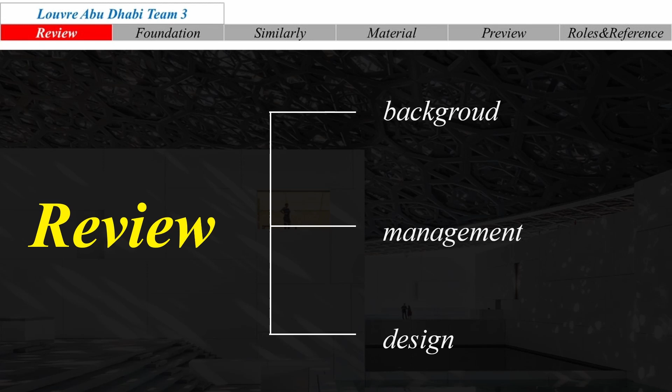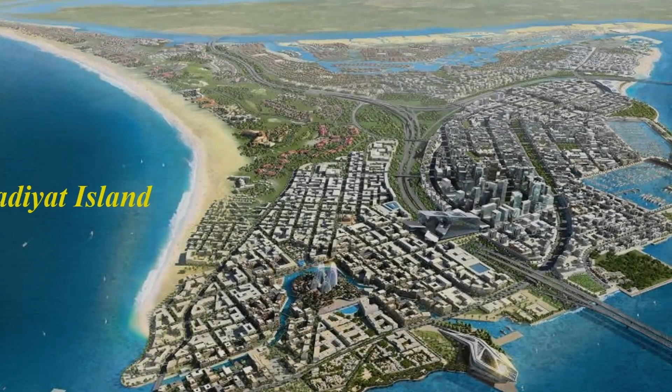Last time, we talked about the background of the construction of the Louvre Abu Dhabi, the process of the construction and design. Abu Dhabi wanted practical and eco-friendly development measures through various economic industries away from the oil-oriented economy. They built a culture and tourism industry on the island of Saadiyat, the first of which was the Louvre Abu Dhabi. However, the construction process was not smooth.

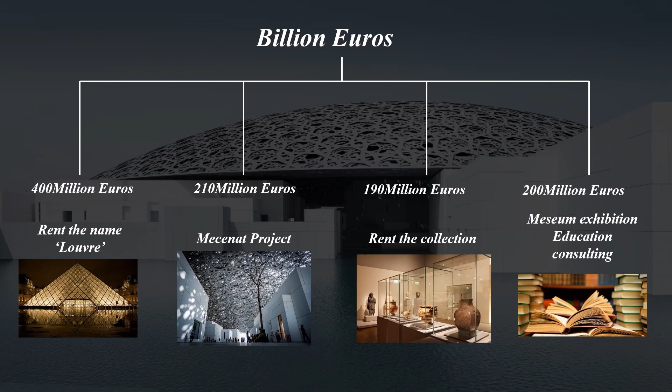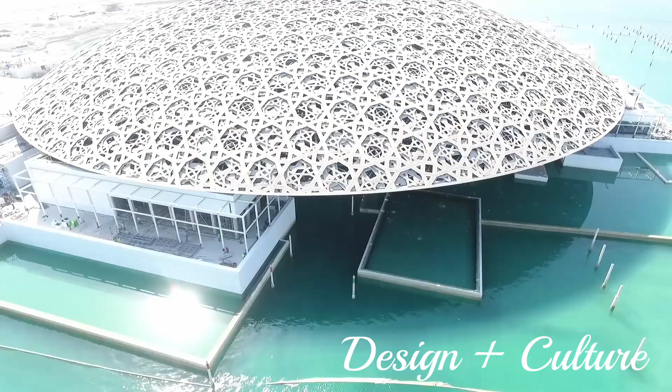In the design process, Abu Dhabi also wanted to show its culture through its architecture. As a result, the current site where concrete, water, and light can be harmonized was selected. Arabs had to control light when they built buildings because of the hot sunlight. Therefore, we created an oasis by adjusting the light so that only 1.8% of sunlight can be transmitted by applying the style of Mashrabiya to the attractive dome shape.

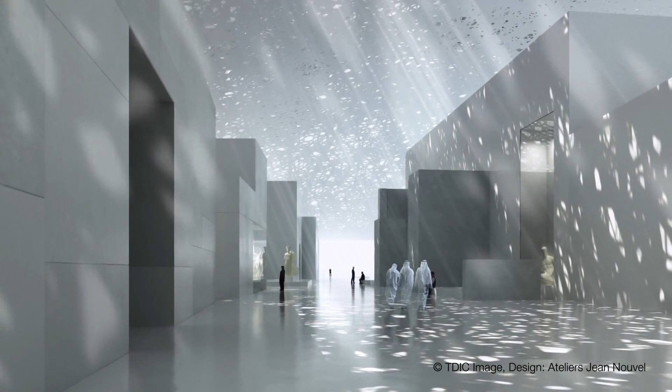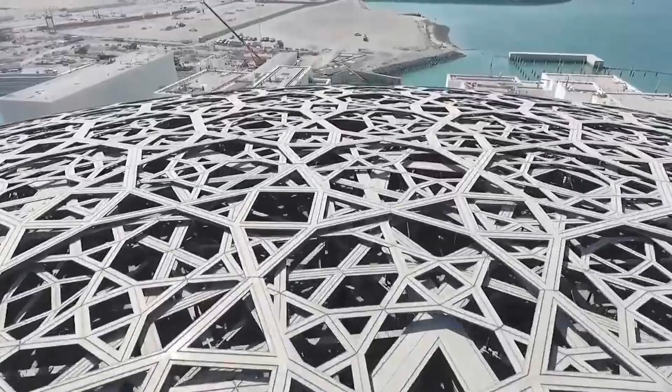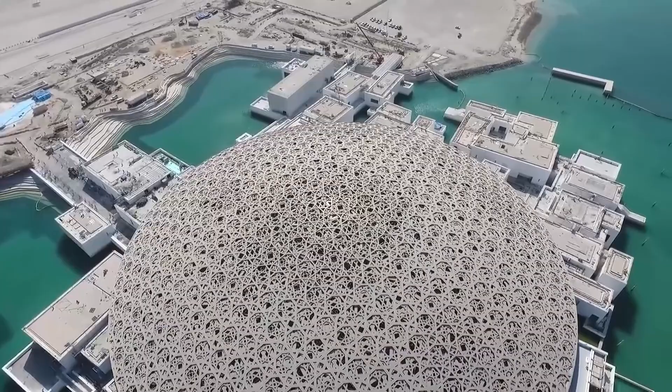These beautiful dome designs have created 7,850 different beautiful rains of light by overlapping 8 layers of arabesque patterns. The shapes below the dome contain the Arab culture that flourished in the past. To create an island on the sea, such as Archipelago, a sand island near Abu Dhabi beach, we connected the sea with the motif of Falaj, an ancient irrigation system in the United Arab Emirates. Finally, concrete. Let's start with the foundation.

I will explain the basic construction of the Louvre Abu Dhabi in chronological order. First, I will explain the process of building a building. In February 2006, a delegation, including the French Minister of Culture and related persons, arrived in the United Arab Emirates. They wanted to build a world-class museum in Abu Dhabi. The proposed site was a sand island called Saadiyat, which means an island of happiness, located only a few hundred meters away from Abu Dhabi's port.

There were once many people living on Saadiyat Island, but at the time it was home to seabirds and nesting turtles. Also, in the 1970s, there were greenhouse-like factories to supply tomatoes and cucumbers to cities. Even the most notable visitor of this period was heavyweight boxer Muhammad Ali. Abu Dhabi wanted to transform the island to help its economic power, and in March 2007, negotiations and plans were announced.

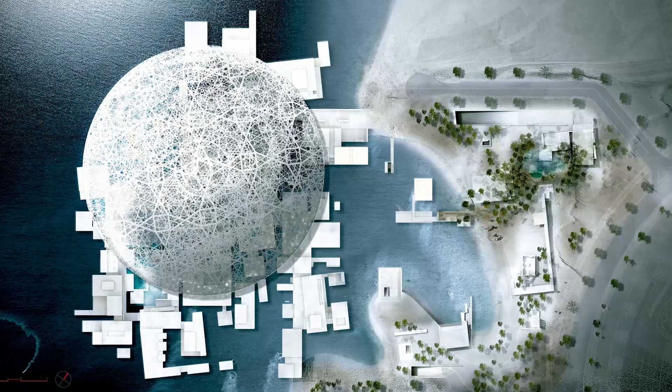The plan is to connect new bridges and highways to the island and build a culture and arts center. As a result, the Louvre Abu Dhabi Museum is at the center of the communication between local culture and world civilization. The previous plan was to open the museum in 2012, so a huge shoreline and sand barricade was built in the sea. Millions of tons of sand were also pumped into enclosed spaces to build the foundation of the museum with concrete pillars and steel rods.

However, construction stopped as the global financial downturn that began in 2008 and the Arab Spring in 2010 postponed its opening until 2014. Subsequently, construction of the Louvre Abu Dhabi resumed in January 2013. Louvre Abu Dhabi pursued a design direction that connects sand and the sea. Later, they were going to refill the water and make it look like it was floating in the water from a distance. We sought a well-balanced design of water and high dome roof in the lowest area of the building. At the time, the project manager said such a design was like taking an empty bottle and putting it in the water.

During the suspension of construction, the Louvre Abu Dhabi construction site returned to its original state. A huge pump runs 24 hours a day, all year, draining water up to 7 meters below sea level through the dam wall. Even if the water was draining, the salt water that continued to permeate it was not suitable for preserving the museum. So, when the construction resumed in the spring of 2013, the first task was to install the waterproof membrane around the entire building.

The waterproof film is made of double-layered green waterproof sheet. The layer was divided into heat-sealed compartments and then vacuum tested to ensure there were no leaks. To prevent further water intrusion, 4,500 columns were wired with a system to prevent concrete corrosion. And the next section is an example of buildings similar to the Louvre Abu Dhabi. There are many landmarks in the hot weather of the United Arab Emirates. In addition to the Louvre Abu Dhabi, there are Burj Al Arab, Masdar City, Cayan Tower, and Burj Khalifa.

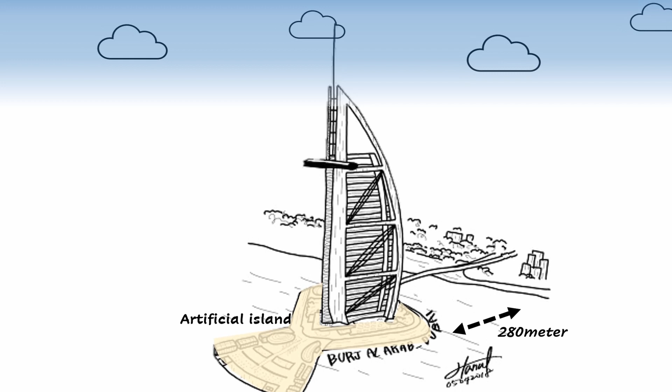Among them, there is a building built on an island similar to the Louvre Abu Dhabi. It is Burj Al Arab in Dubai. Let's compare this building with the Louvre Abu Dhabi. Burj Al Arab is based on an artificial island 280 meters from the beach. The artificial island is located 7.5 meters above the surface of the water.

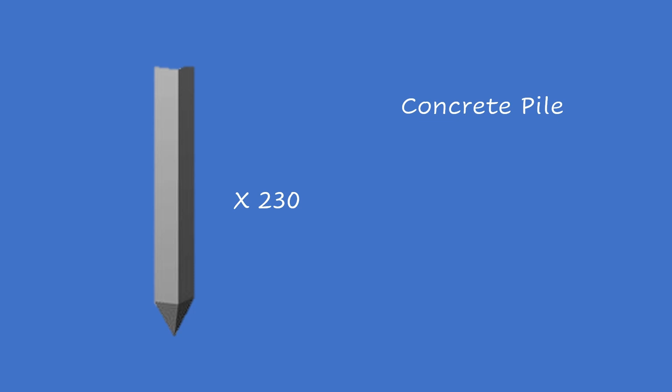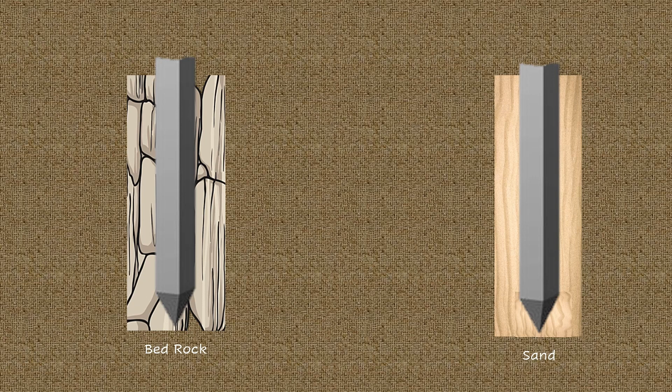The main concern in building Burj Al Arab is to protect the island. It was necessary to prevent the waves from breaking and affecting the structure over the island. To strengthen the foundation, 230 concrete piles with a diameter of 1.5 meters are embedded 40 meters below the sea floor. The foundation of the building is not supported by bedrock, but by friction between concrete piles and sand.

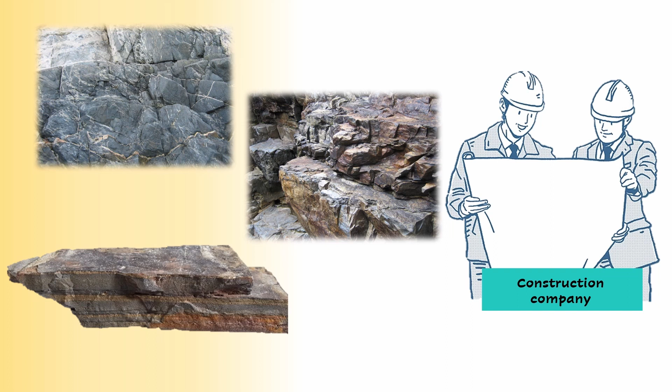After the foundation of the building was built, the ground floor was built. At the time, architects and construction companies had conflicting opinions. The construction company's opinion was to use rocks that could easily use existing technologies. However, architect Tom Wright rejected the proposal. His concept is a ship floating in the sea that allows people to get closer to the sea, because using this technology makes buildings go up too high. Therefore, concrete blocks of unusual shape that can reduce the impact of waves were used.

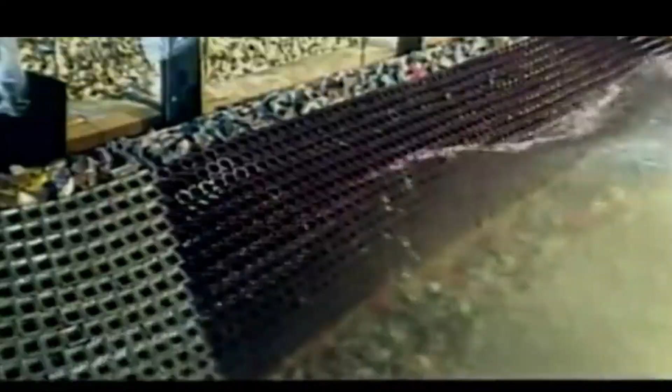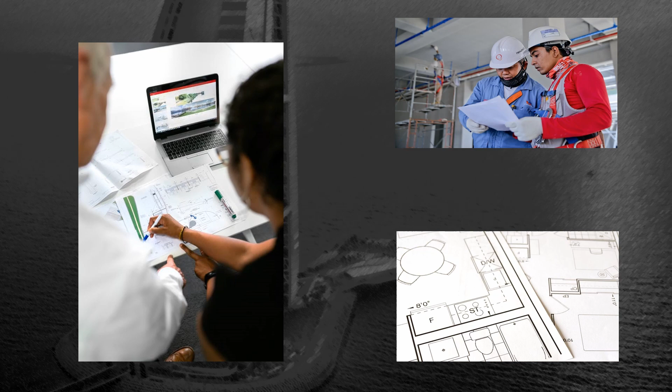Experiments were conducted for stability. The experiment reproduced the waves in the Arabian Gulf over the past 100 years and allowed them to collide with blocks under various conditions. The concrete blocks, which were recognized for their stability after 3 weeks of experimentation, were used technically and aesthetically to complete the Burj Al Arab. This Burj Al Arab example shows the flexible construction techniques when it is an artificial island with strong waves.

In contrast to the Louvre Abu Dhabi, concrete blocks are used to fix the foundation with friction between concrete piles and sand and block waves. Since the waves are weak at the Louvre Abu Dhabi, no separate method of blocking the waves was used. However, strong waves can come from earthquakes and tsunamis. Therefore, it would be much safer to use concrete blocks such as those used in Burj Al Arab.

Now, we could elaborate more details of the materials of the foundation and waterproofing solution of the Louvre Abu Dhabi. Brian Cole, who is a director with Buro Happold Engineering, said, "This project combines one of the most aggressive external environments, seawater, and one of the most stringent requirements for dryness. Especially salt water is the enemy of museums and the precious objects they conserve."

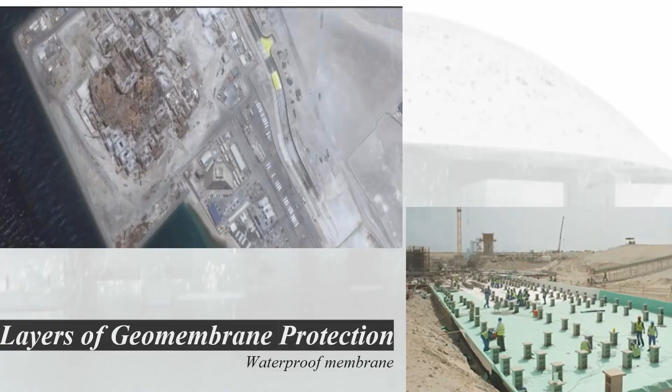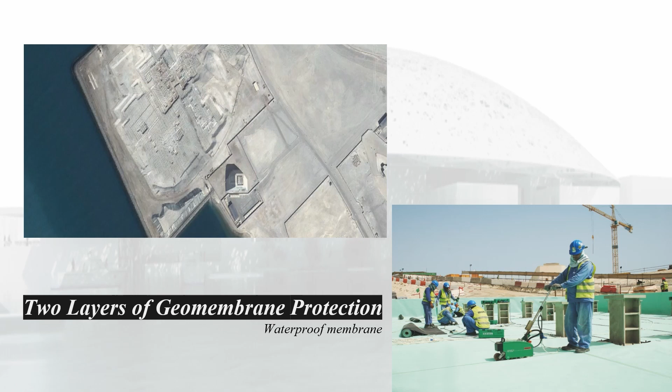So, as construction resumed in the spring of 2013, one of the first tasks was the installation of a waterproof membrane to enclose and protect the entire building. To ensure watertightness, a two-layer system was selected. A 1.6mm thick TPU Sikaplan membrane was specified for the lower geomembrane. For the upper geomembrane layer, another 2.5mm TPU Sikaplan geomembrane was selected.

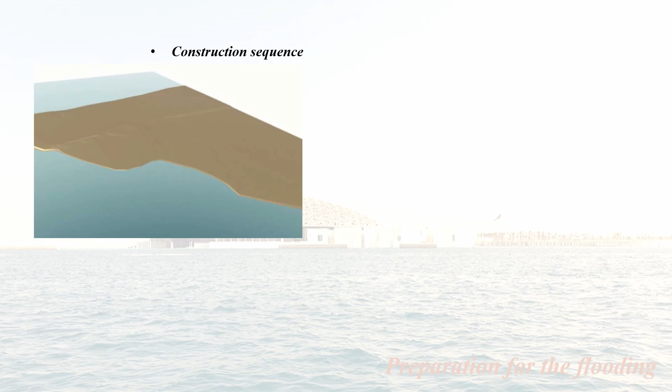The coating system for the waterproof membrane is designed specifically to withstand the harsh saltwater environment and desert conditions. The combination of Galvosil and Hempadur Mastic ensures excellent weather and abrasion resistance, while the Hempathane top coat gives the dome a beautiful and extremely durable gloss finish that will last for many years. Along with the strategy to protect the Louvre from water, sand, and heat by waterproof membrane for the overall structure, a water flooding strategy was also needed for the final stage of flooding.

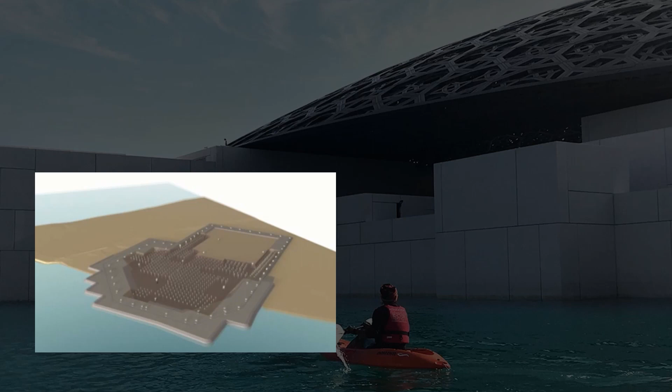Basically, the design for the museum was intended to create the impression that it was floating on the sea. Also, when accessing the museum, you should be able to enter by car or by boat. So, the engineers were basically responsible for making it possible for the sea to enter the museum site while being protected from it at the same time. The final stage of the construction meant that the water must return by removing and lowering the revetment and temporary platform and allowing areas to flood, creating a lagoon on the mainland.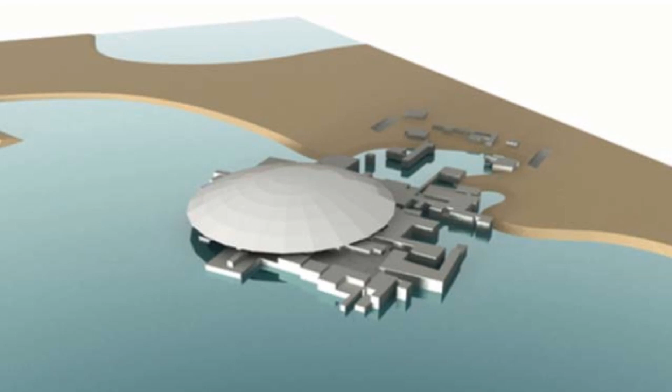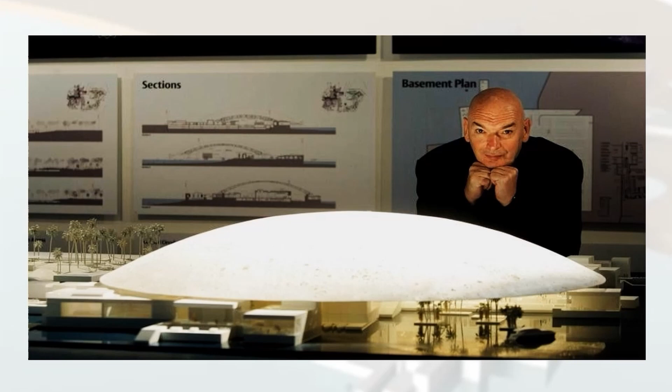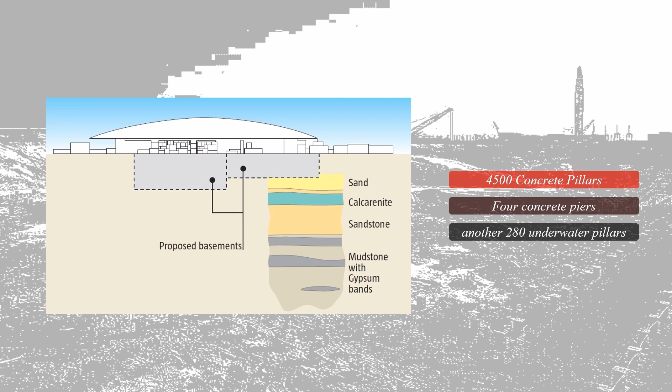That's why strategic pile foundation methods were important, so that they could fully realize Jean Nouvel's vision for the Louvre Abu Dhabi. Because of the relatively poor conditions of the near-surface soil at formation level, a piled foundation solution has been adopted for both the dome and the general structures. 4,500 concrete pillars were buried in the sand to build the foundation, including 4 massive 110 meters of concrete piers on which the dome rests. They are hidden in plain sight so the dome appears to be floating.

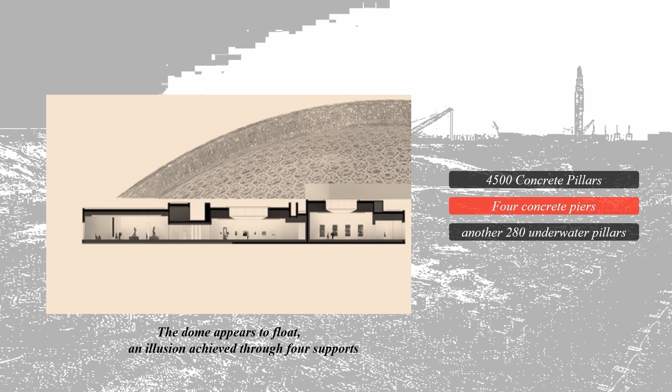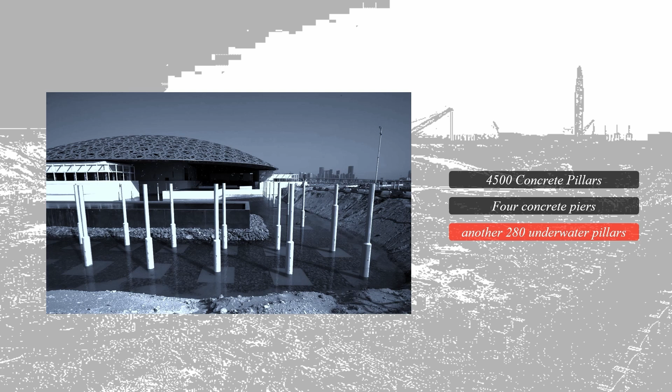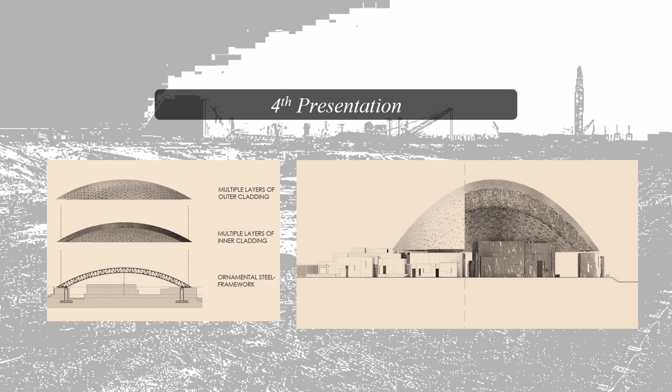Around the edges of the structure, another 280 underwater pillars, concrete breakwaters, and tidal pools were added. For the 4th presentation, we will explain the construction following the foundation, and other materialities such as the ultra-high performance concrete of the dome. Thank you for listening to my presentation.